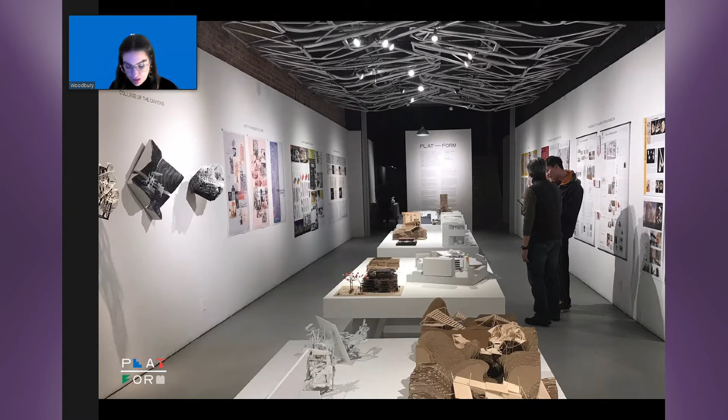Platform was founded 4 years ago by the Woodbury Chair of Architecture in Los Angeles, Heather Flood, and was created as a new and collaborative opportunity to recognize and celebrate incredible work happening throughout art, media, and design programs in our state's community colleges. What started as a symposium would eventually transition into an annual exhibit at WUHO, our Woodbury Gallery in Hollywood. This history makes clear that when you have the opportunity to see this collection of incredible work from disparate cauldrons of creative development, it deserves a platform for cross-pollination of ideas.

When looking at ways of hosting Platform this year, we considered creating a virtual gallery, but knew such a venue would be bereft of the thing that makes Platform so dynamic: the people. Beyond the celebration of the work, what we hope Platform does tonight, as it has done in the past, is create a space of interpersonal exchange.

Platform has taken many forms in the past, and tonight will be no exception. This year's installment comes in the form of a virtual Pecha Kucha night. If you are new to this format, the rules are simple: each presentation is exactly 6 minutes and 40 seconds, 20 slides, 20 seconds each, firing off like a creative machine gun. The slides move so rapidly and automatically, it's part of the fun and drama of challenging the presenter to do the same. Even this introduction is part of that format.

Tonight, we have 13 presentations from 11 community colleges spanning the geographic and disciplinary diversity of Southern California.

From the moment I started working with instructors and institutions— Erin, I'm getting a feedback loop. I don't know if anybody else is. No. I'm going to keep going because the time's going.

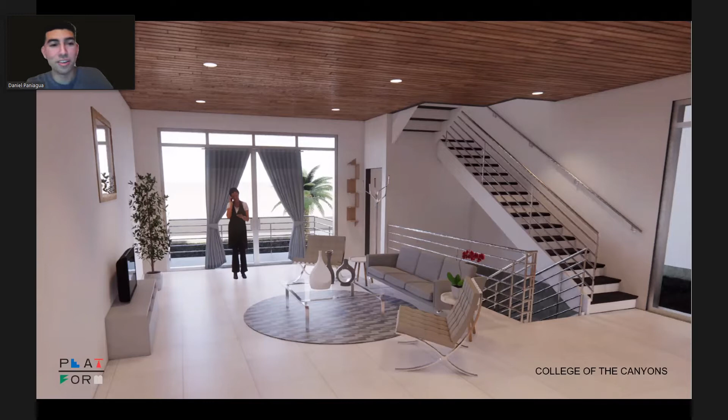Hello everyone, this is my interior rendering of the final project for our introductory course of BIM, specifically using Revit. So here I decided to add just enough components to give a potential client a good idea of what the space can look like if they were to occupy it. However, I also made sure that the image was not too overcrowded.

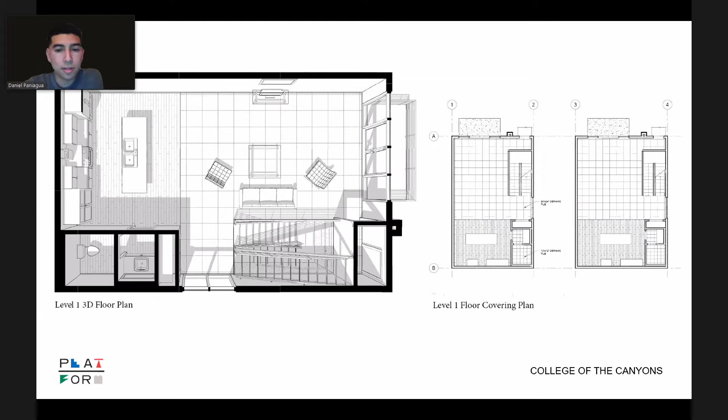I placed this image on the left to show how the use of cameras can really make certain views more interesting to look at, in this case resulting in a 3D floor plan. We also looked at different ways which we can display materials. On the right side, we use fill regions, while on the left, we played around with splitting faces and applying paint. Now we finish with an exterior rendering of the northern part of the building.

Hi, my name is Christian Filip. I'm an architecture major, and I'll be presenting the project I completed in the design studio class at College of the Canyons.

For my concept, I decided to lower the roof line closer to the height of the adjacent buildings in order to have my buildings fit in more harmoniously. I placed the entrance of the Warby Parker store at the east opening of the facade and kept the cafe seating right off the exit of the cafe.

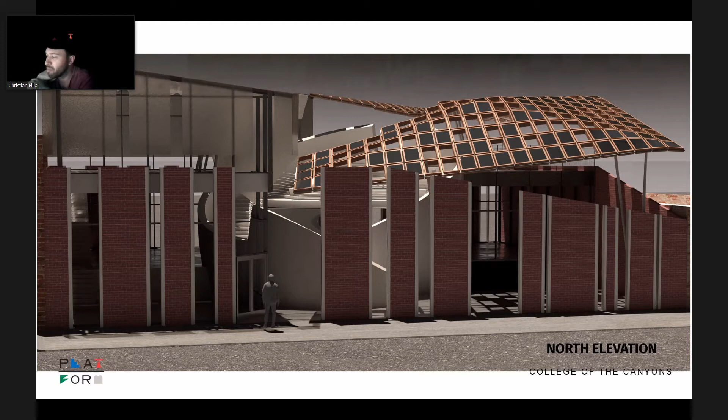For the facade, I wanted to use materials that blended in with the environment, but chose to break it up sporadically in order to allow light into the space beyond, as well as allow people to get a glimpse of the Spanish Stair. This was imperative since the steps were intended to be used as a public space by the community, and so I did not want them to appear hidden behind a solid wall.

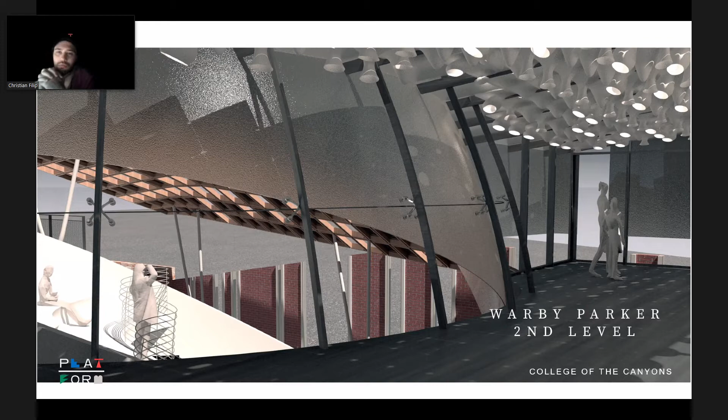This is another rendering from the Warby Parker store on the second level. Looking toward the Spanish Steps, you can see the polycarbonate second facade and also the ceiling installation to better show the lighting in the space.

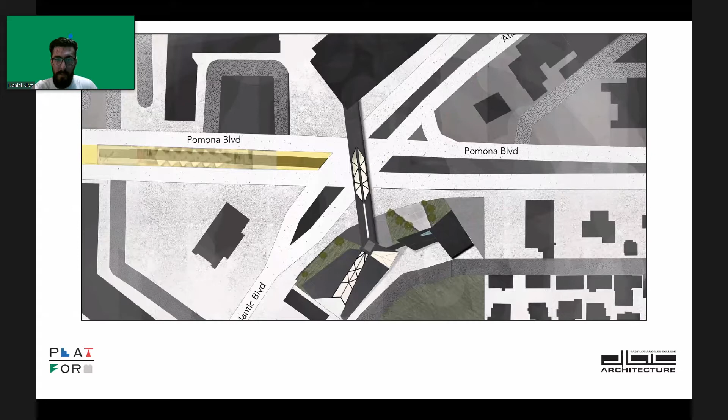This is a fabrication building, and this is where the students would study. The way I came up with that design was to take the vector lines from Atlantic Boulevard and Pomona Boulevard, then create another vector line from my site to the parking lot, bring the vectors onto my site, and then extend a bridge out to connect to the parking lot.

Next, I used existing tree grids that are on the site. I didn't really want to touch the trees that exist on the site because I saw them as a potential buffer space between the sidewalk and my design proposal. So I used the tree grids and combined them with the vector lines to try to form my program out of that.

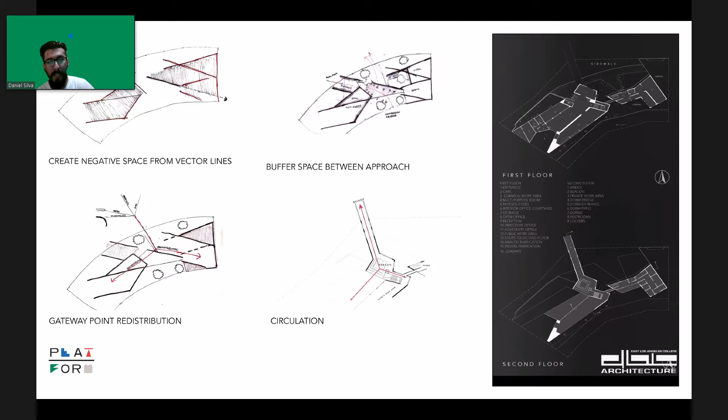Next, I use the vector lines, and where they intersect, I use them to create negative space to create my program. But then when I brought down my vectors onto the site, at the converging point for the gateway, I saw that as a potential way to lay out my beacon, which could be seen off the 60 freeway.

For my beacon, I went with a darker color because I wanted it to be able to be seen from the 60 freeway. But also at nighttime, I wanted it to be lit, so it's still a beacon at night.

Hello, everyone. My name is Stephen Curtis. Swavilion is a community center design project based in East Los Angeles.

The project design is inspired by the cultural artistic tribal masks of the three most populated ethnicities within the area, representing not only East LA, but its connection and integration to Montebello as well as Monterey Park communities.

The site is located along the border of Monterey Park and East LA. I wanted to capitalize on the foot traffic that came from the Metro Gold Line along the intersection of Atlantic and Pomona Boulevard. I also wanted my overall shape to serve as a 360 view to capture the surrounding mountain views within the area while fitting to the form of my site.

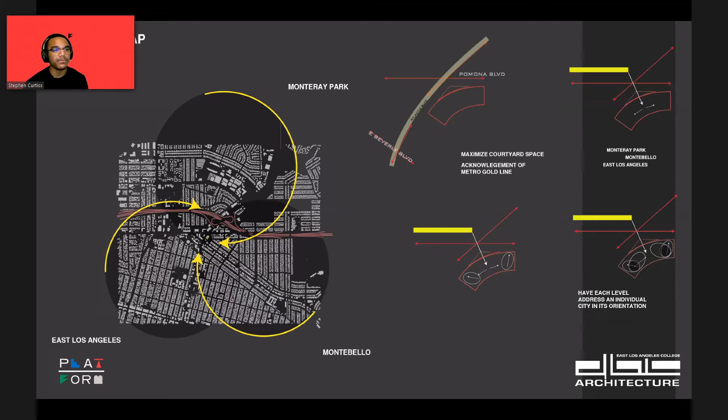After developing the traffic and public transportation, I began to break down the chosen tribal masks from Aztec and Asian cultures to determine elements such as the circulation, facade development, as well as overall spatial relationships.

The program is organized to express public outdoor program toward the lower levels and private toward the upper levels. For example, level 1 provides a grand entrance greeted with an open courtyard, cafe, and fabrication shops. Level 2 quiets down the program with classrooms, study rooms, and offices, while level 3 provides private dorms.

My exterior circulation mimics the contours and patterns of the Aztec and Asian tribal masks, whereas my interior circulation is formed and developed on the double spiral staircase.

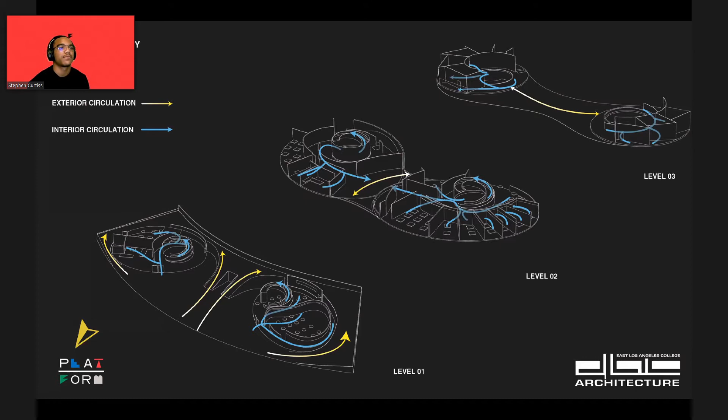On my northeast elevation, you can see how the second level extrudes. On the southeast elevation, you'll notice the separation of programs of the left and right wing, connected by the exterior wooden deck space provided at the second level exterior courtyard.

To better control the building's natural light intake, I positioned the obsidian facade to wrap around the structure, sitting along a 180-degree panel to not only absorb, but position natural light within the interior space when necessary.

I wanted to use materials relating to the culture's tribal histories. I used travertine, a relatively bright stone, for the outer shell of the design. I used fritted glazing for the unique apertures that wrapped around the structure, and obsidian for the facade panels and foliage along the courtyard space on the ground level.

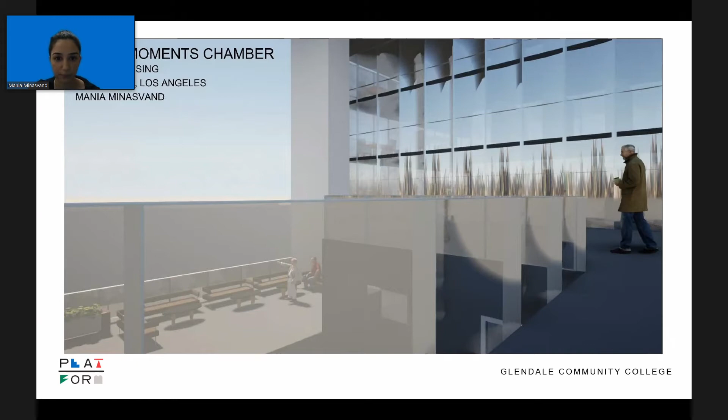The site is located in downtown Los Angeles at the intersection of West Pico Boulevard and Hope Street. The Dignity Health California Hospital is located at the southeast corner, less than half a city block away from the project location.

The project site is located in the middle of Los Angeles' evolving skyline, from low-rise building to high-rise building. So the rising height of the building represents the milestone of time.

The word Janus in my project title, Janus Moments Chamber, is taken from Roman mythology. Janus is an ancient Roman god who is the god of beginnings and ends, with two faces, one facing the past and the other facing the future.

To the northeast of the site, we can see Los Angeles' downtown skyline, which represents the future. To the southwest, we can see low-rise buildings that represent the past. So the rising height of the building represents the milestone of time and the present.

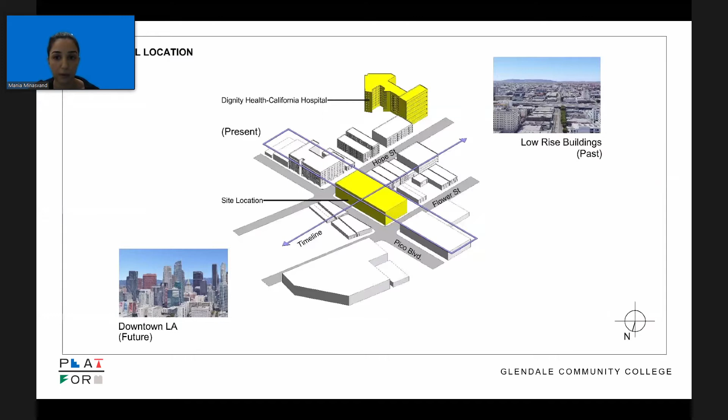This image is the parti diagram of the chambers. The living units form a solid block, voiding a hole in the center to define the space of the time machines, which are the theater and the library. The yellow part on the right image is where the theater and library are located.

The moments are an accumulation of the present time of seniors occupying the living units. The living units and corridors are facing each other, so residents have to interact with people before they enter the unit. This encourages social interactions.

The chamber consists of a theater and a library. The library is to unveil and recreate memories, to preserve and store the past. These chambers are a metaphor of a time machine for people to commemorate those moments. The library is the contents of life, because each chapter of the page is each chapter of life.

It is a place to access the wealth of history and information, to preserve the past, connecting people to unforgotten knowledge, but also encourage social interaction. The theater is a place to retrospect and unveil historical memories, a reflection of society, both present and past.

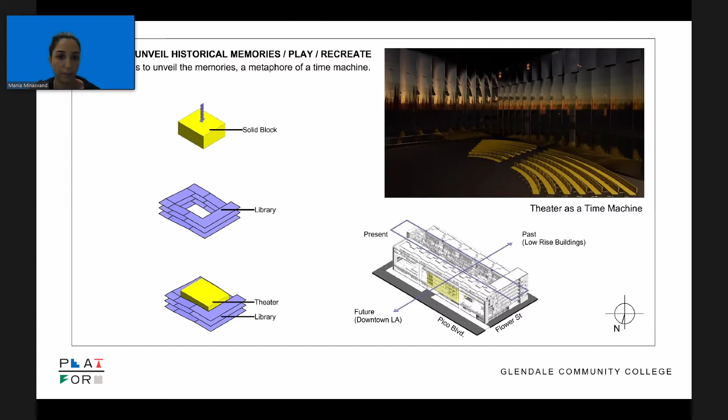As you can see on the diagram, the theater is a solid block placed in the center of ramps and floors, which is the library. The main circulation ramps, as you can see in the center, are forming the void shape of the theater, and it is forming the solid shape of the library. There are emergency exit staircases, main stairs, elevators, and ramps on each floor.

What do elderly people really want? An emotional scene performed by actor Rutger Hauer in Blade Runner carries out his famous quote, 'All those moments will be lost in time, like tears in rain.' This inspired me. The idea is not to cheat death, but rather to preserve, unveil, and commemorate all those moments, so these moments will not be forgotten.

The curved glass facade of the library and the theater are to create and reproduce the moments and images of a person walking by, to exhibit the function of life.

The building has 2 underground parking levels, a total of 200 parking spaces, including accessible spaces. The ground floor contains drop-off areas, an entry lobby with elevators, and storefront retails.

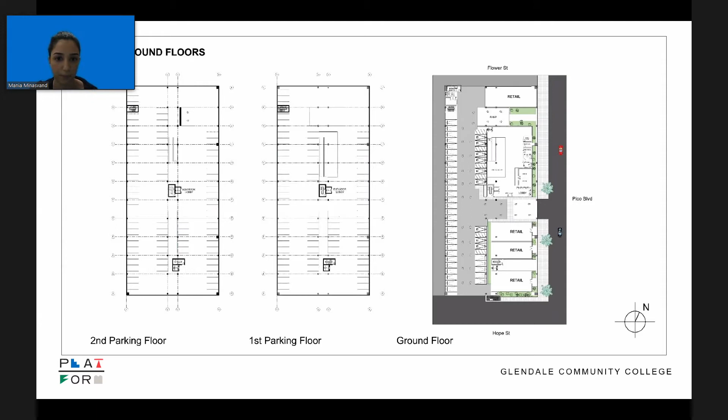The next level is the common area floor, which contains the care center, fitness room, outdoor exercise area, event and game room, and outdoor sitting area. Also, the main entrance of the theater and the library is on this floor.

There are a total of 53 living units. Each unit has its private balcony. 36 one-bedroom units are on the first, second, and third floors. Each floor has an entrance to the library.

16 two-bedroom units and 1 three-bedroom unit are on the 4th and 5th floors. There are also an elevator and ramps for each floor for them to reach different levels. Here are the 1-bedroom and 2-bedroom unit floor plans as well.

Here is the longitudinal section cutting through the 4th and 5th floor living units, also the library and the theater. As you can see in the image, there are also ramps from the underground parking floors up to the ground floor.

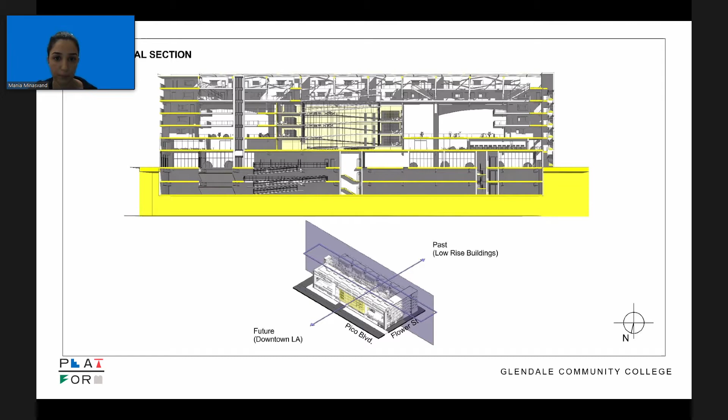The cross section also shows the living units, library, and theater. The living units on each floor are on one side, so seniors can have the maximum view from both directions, north and south. The corridors are in the center between living units, so they can have social interaction.

The answer to the question, what do elderly people really want, is: since they cannot cheat death and they cannot have more time, they want to leave a trace of their existence. Thank you, everyone.

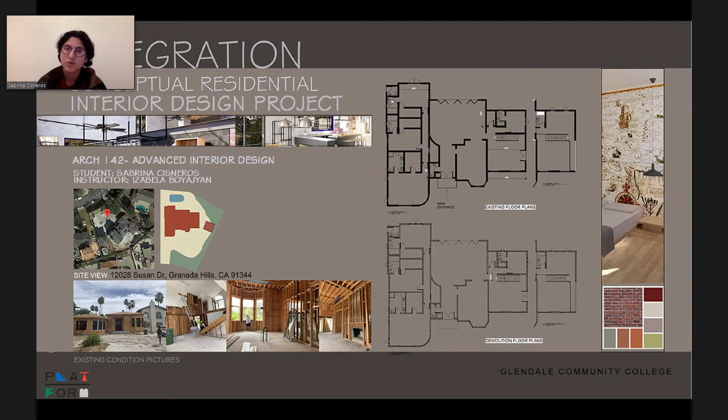The interior design integrates industrial and farmhouse design styles. My client's requirement was to create comfortable spaces within his home office, adding 3 bedrooms, each with their own bathrooms, and a relaxing room. The first level floor plan is located on the right of your screen, and the second level on the left.

The moment you enter the house, we appear in the interior garden, which leads to the public spaces to the right and the private spaces to the left. On the right-hand side, we have the kitchen and dining room.

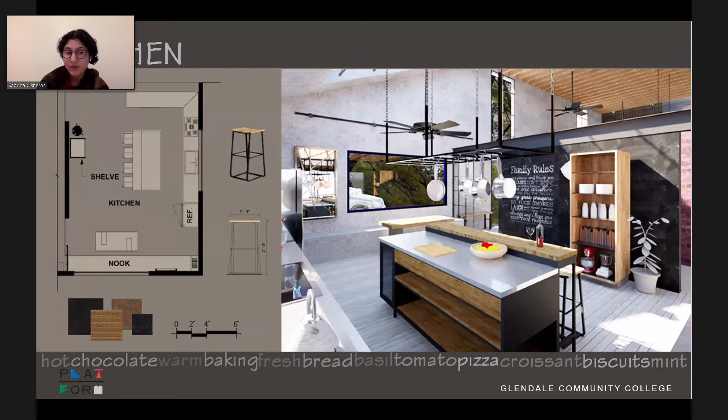Materials used are wicker wood and stainless steel on countertops, which makes the furniture durable and easy to use.

As you see from the floor plan, the bedroom has its own bathroom. The open concept makes the space practical to grab clothes. Since my client likes to travel, we decided to incorporate a big accent wall by using customized print wallpaper on the back as the major focus point of the bedroom to enhance the space.

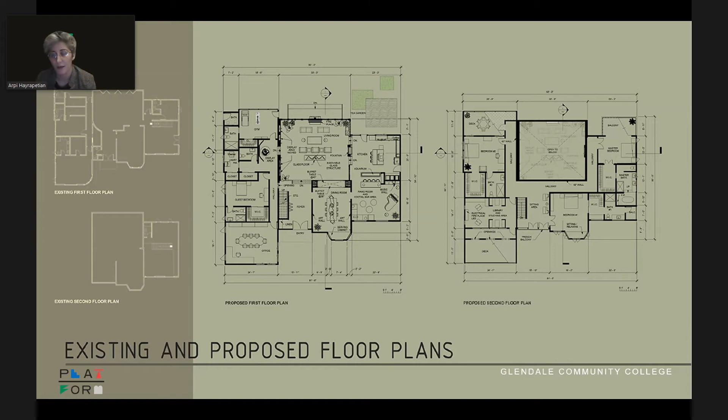I put every public area on the first floor, like the library or the kitchen, but the bedroom is on the other floor, the second floor. The great room, which is the main emphasized part, I put two stairs lower than the rest. And this is the great room.

It's not only for gatherings, but also to display honors, art pieces, and art collections as you wish. Inspired by Persian style, I designed art niches and used colored windows to make the entire west wall a unique display area.

Another thing that inspired me is the reflection of Persian stained glass. So I designed a movable structure here, and it has two functions: visual separation and a transitional element that creates comfort and coziness in the house.

For the kitchen, I started designing with traditional elements such as moldings and mullions, which remind me of old Parisian doors. It's also connected to the living room with the waterfall, and to the piano room with the aquarium.

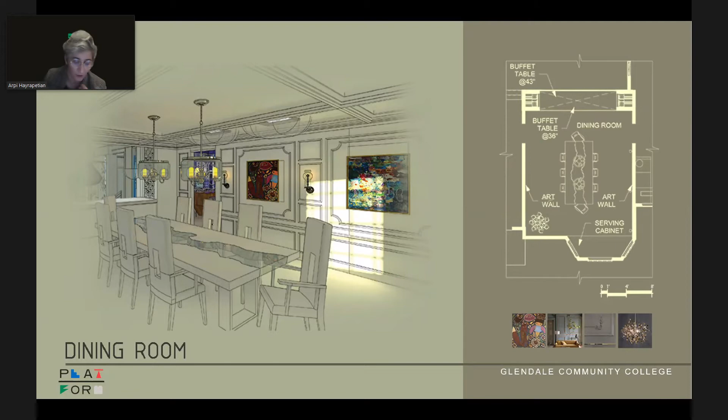This is my dining room, separated with a buffet table which has an under-counter wine cellar, and it displays on the whole wall the art of the French, the contemporary arts.

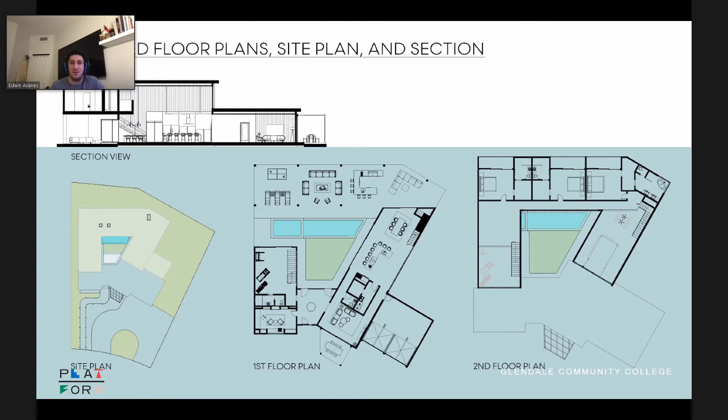Now in this room, although it seems like a small space, the usage of soft colors and natural materials brings a calm atmosphere that allows someone to get away so they may work, study, and relax. These are just some of the highlights of my project. However, this room is a focal point of what was being achieved for my design. Thank you very much.

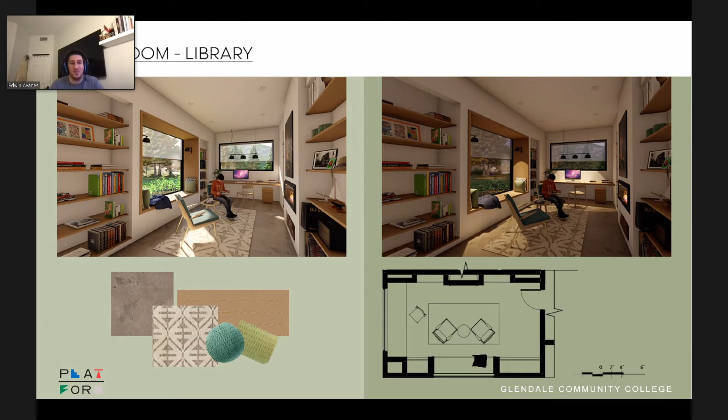Aaron, you're on mute.

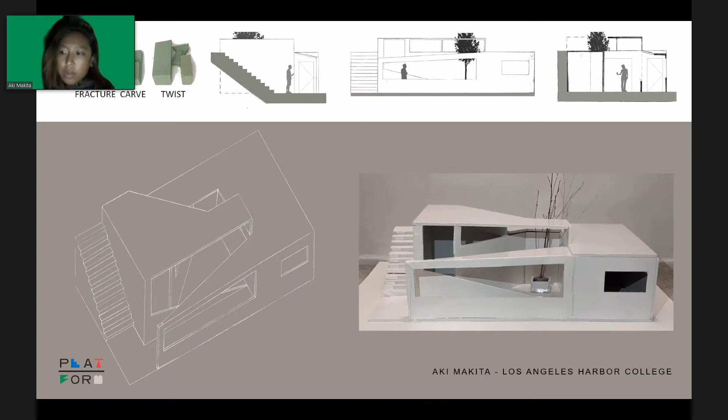Hi, my name is Aki. This project is a weekend retreat on a hillside. The forms are based on subtractive operations of carve, fracture, and twist, resulting in an internal courtyard. The design features subtle height differences that vary visitors' perceptions of horizontal and vertical space.

Hi, my name is Lucy Taylor. This was a study of subtractive forms in architecture. Using operative design strategies, we were to subtract and displace the volume of a solid box into a small three-zone building that takes view, sun, and topography into account.

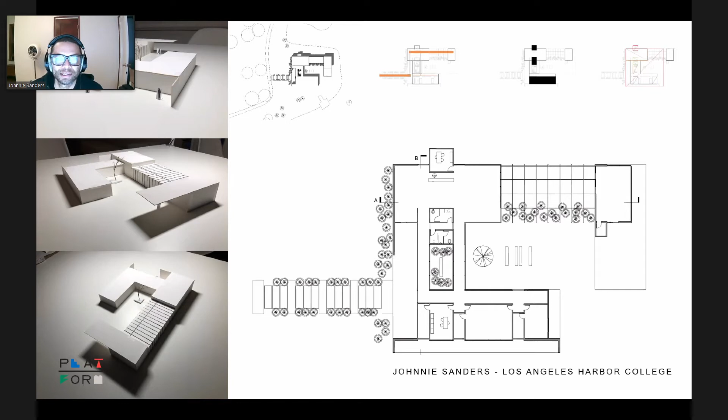In this case study of Craig Ellwood's House Number 16, we examined structure, circulation, open and closed spaces. We can see his use of long, thick linear structural walls in combination with large glass panels to define structural elements. The circulation from one part of the building to the next is defined by long passageways connecting the rooms or open and closed spaces. Ellwood also uses repeating structural elements, which I incorporated.

This project is called Big Brother, Little Brother. It is a series of spatial constructs based on the ideas of Plummer and Swisher that explore the relationship between grids, modernism, and digital life. The strategy of analogous design was applied to create U-lines, figures, and fields in relation to grids, proportions, and intersections.

The Glassman Residence, my case study research assignment, was built by architect Richard E. Quinn in 1966. The home showcases its cross-shaped floor plan below. This diagram best describes the organization of its form through its structure, parti, and geometric elements.

Well, this is mine. In this case study, the architect Julian Neski mainly focused on voids and keeping a simple circulation throughout his building while trying to capture the view of the amazing ocean. So I tried to incorporate those ideas in my project as well, trying to keep the similar structure and massing.

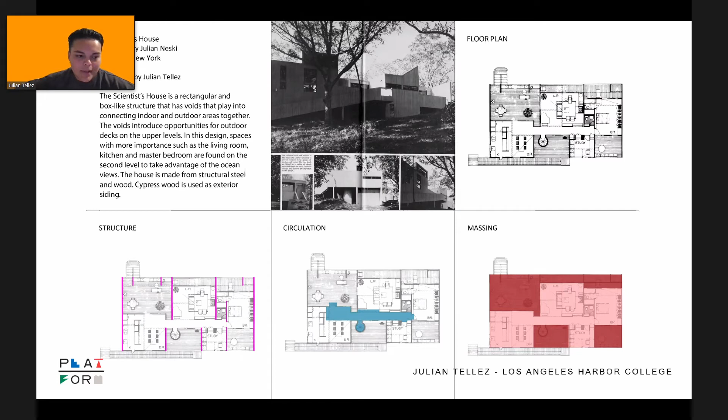So the site's best view faces east towards an open body of water, so I wanted the first floor to have a lot of open space to best bring in light. Once I knew where I wanted each room, all I needed to do was punch holes in the appropriate places that best relate to the case study. I'm just glad I chose this case study because I think it fits well with this project.

For my design, I decided to focus on semiotics, which identifies an object with a signifier, its physical existence, and its signified, its mental concept. Therefore, I decided this squiggle shape to represent rooms so I could have shifting floors, roof axis, and building gradients.

This is the result of the museum. It is designed with 3 floors, 2 above ground, and 1 subterranean gallery, as well as a subterranean parking lot. The subterranean gallery and parking lot are to the left, and the 2 other floors to your right.

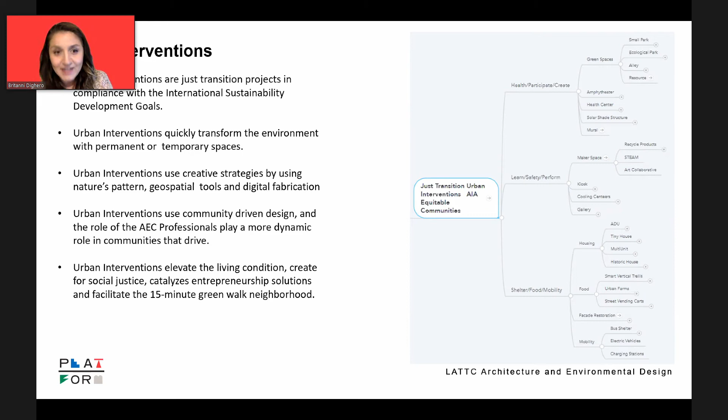Our focus at LATTC is urban interventions. On the right, you can see the taxonomy of our efforts as we study and practice this phenomenon, never starting from scratch and always building upon information, resources, and efforts gathered in previous semesters. As the program grows, so does our knowledge base, and in turn, our creative solutions and strategies.

Our residential urban intervention focuses are tiny houses, accessory dwelling units, and multifamily residences. These modular templates make the inner workings of architecture approachable and accessible by making it easy to customize and build upon, while keeping the projects within building codes and regulations.

Our urban intervention designs focus on sustainable solutions, considering water, energy, wind, and recycling. Here we see various ADU designs with customizable modular orientations, solar path, wind path, and water recycling considerations.

Here we see how our tiny house templates can be easily customized, further promoting the tiny house ideology of environmentally conscious, self-sustainable, holistic, and simple living.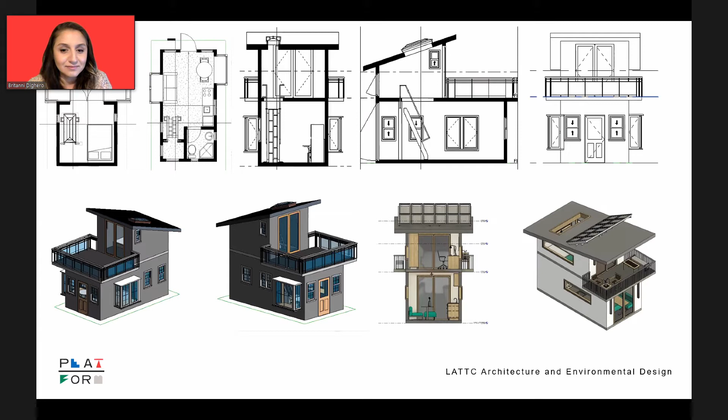Other urban intervention projects include conceptual designs for large open-air community spaces inspired by the Spin Campus plan, which uses digital manufacturing, cargo containers, and pre-manufactured materials. Professor Oliva believes green builders and developers should consider creating a center or network to develop and nurture green spaces as a strategy for sector success.

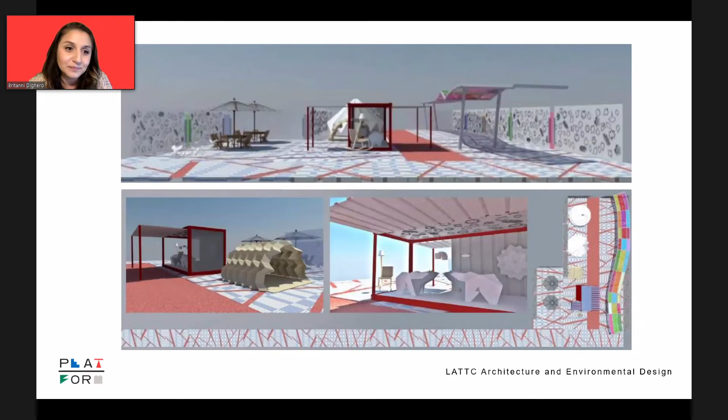This innovative alley renovation proposal makes the most of the space available by transforming it into an archery range and field, promoting community engagement and outdoor activity. The vibrant and eye-catching design and murals add to the excitement of the activity and the transformation of the space. The obstacles allow archers to take cover and strategize while they play.

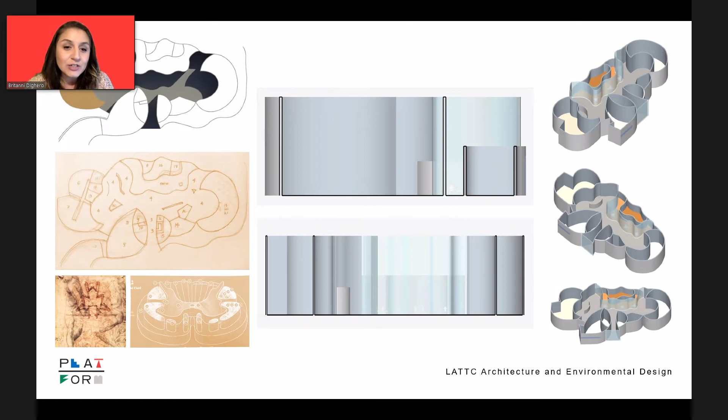This proposal for an outdoor interactive museum and gallery space was inspired by Michelangelo's fortification of the city of Florence and curves and geometries found in the human body. This unique idea explores the boundaries for how humans interact with art and exhibitions by bringing them out to the people. These images illustrate just how unique and immersive this design really is.

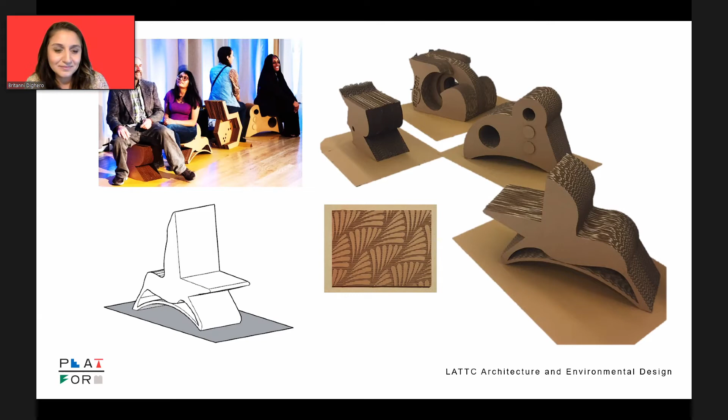Our urban interventions have even reached civil heights, including a proposal for a nature bridge that connects outdoor spaces in a beautiful, elegant, and creative way, reinventing what pedestrians have access to and how they have access to it. This design promotes mobility in green spaces in communities that may have not previously had access to one another or green spaces.

LATTC, along with the Pico Union Housing Corporation and the Puede Center, have worked together to create proposals for the community to transform alleys using green alley renovation strategies, such as vertical trellises, facilitating quick, efficient, and vibrant changes to the most neglected areas of our neighborhoods. We hope you've enjoyed the efforts LATTC is making to build a better world.

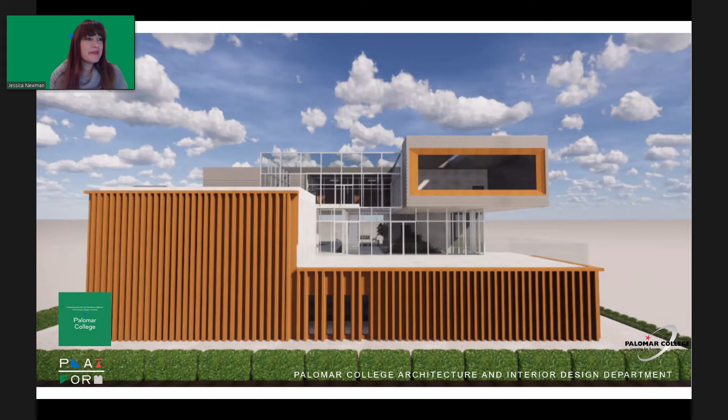Hi there. In the spirit of collaboration, we brought together an architecture class and an interior design class to work together on a team project. This project was a new building on Palomar's campus to house the architecture and interior design departments. Today, we're showing a project solution from one team, Natalia Olivera from the architecture department and Michelle Yip from the ID department. Each semester we try to come up with an exciting and dynamic project for our students to dive into. In Studio 217, we study site connectivity, code, and in this case, the collaborative nature of our industries.

We were fortunate that Palomar had a vacant lot that the students could study and create their own learning environment. Here you can see the student went out and photographed the materials on campus and selected a few that she wanted to explore: bamboo siding, polished concrete, and aluminum cladding. The contrast between these materials created a dynamic elevation, one that blends into the campus seamlessly.

This bold selection of aluminum panels coupled with horizontal banding helps accentuate the cantilever. Here we can see the material is solidly present on the ground plane. This helped to express the building's mass. She created voids that would help define the entry and assist with wayfinding.

Here, the student explores bamboo siding with a vertical application. Once again, it can be found on campus, and this exploration is unique and dynamic. Stairs become a key feature leading pedestrians to the upper floors. Here we can see the cantilever floating above a terrace, inviting students upwards and into the building.

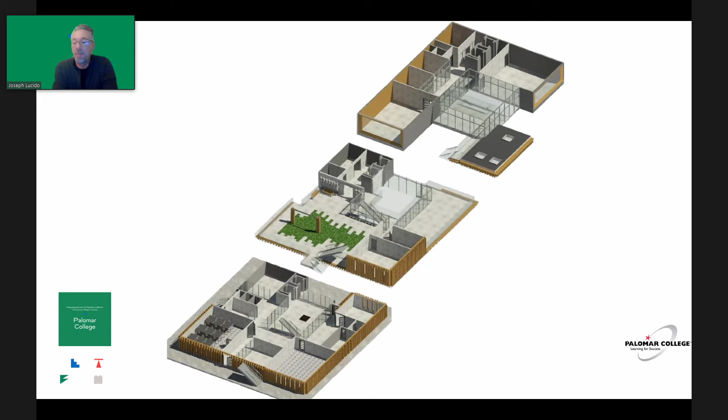Three-dimensional modeling allowed the students to study the vertical circulation and the interior design department's programmatic requirements. This proved to be a key element to allow both students to communicate their design intent. The building you saw may have been developed by an architectural student, but it was certainly informed by her interior design colleague.

On the first floor, we have 2 large classrooms, 3 faculty offices, restrooms with showers, student lockers, print services, a makerspace, and a large atrium. The atrium acts as an entry lobby, a lounge space for students, and an interior landmark for wayfinding. The makerspace, print services, and elevators are located far from the classrooms due to noise.

Here we see an interior view of the atrium. There are digital displays to post information about the programs, such as class schedules, announcements, and guest speakers, as well as showcase exceptional student work. The designers also envisioned that students would design and hang a badge on the tree as an interactive and constantly changing piece of artwork.

In order to justify this 3-story structure, the students envisioned the second floor as a student services space. This floor takes advantage of the beautiful weather here in San Diego, with an outdoor classroom and an open multi-purpose space that can be used for larger groups like guest speakers. There's also a library, study rooms, and a kitchenette.

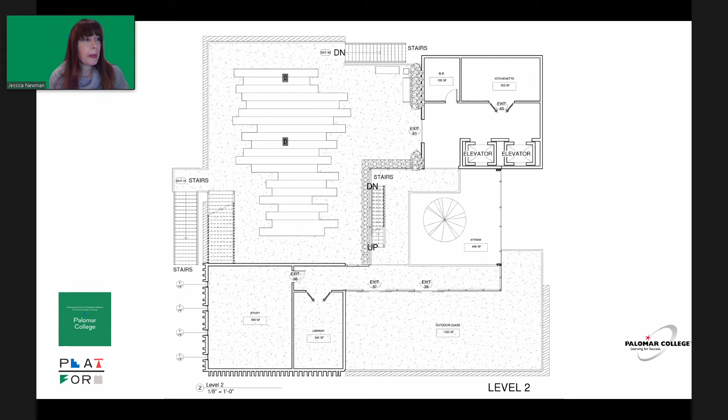Palomar campus is accredited as a level 2 arboretum. It is the only community college in California with that distinction. Throughout the campus, we have ADA compliant nature trails, outdoor sculptures, and primitive plant collections.

The students continued this focus on foliage by incorporating greenery, a connection to nature, and views of the landscaping throughout the interior of the building. This outdoor classroom helps to reduce student sickness caused by indoor air circulation. The framed greens offer shade and help to screen ultraviolet light. Additionally, the green trellis design helps block visual distractions while still allowing students to enjoy the fresh air.

This is a building that prioritizes the safety of its occupants. There are 4 exits, including an extra emergency stair from the second floor to the ground. All of the corridors are 7 to 11 feet wide, allowing for plenty of air circulation. These wide corridors also allow for spontaneous interactions between students. You can stop someone and have a conversation without blocking the flow of traffic.

Enhancing a sense of community is a theme of this building. The designers feel that the form of the building looks like 2 people hugging each other, which is symbolic of the joint effort of architects and interior designers working together.

This project was actually not a smooth journey from start to finish. These 2 talented designers had different aesthetic sensibilities, and they redesigned over and over until they came to this solution.

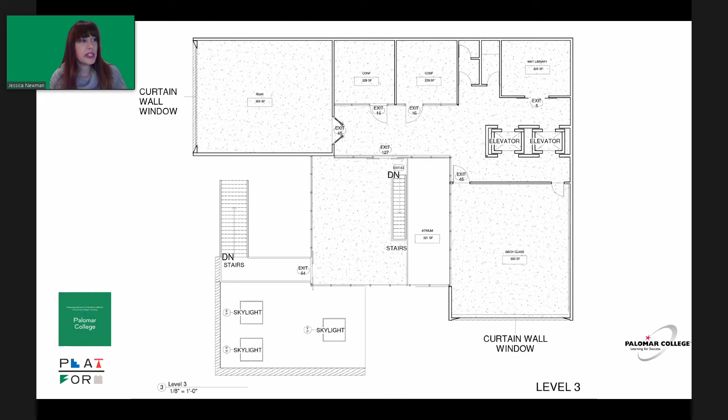We asked students to reflect on their own experiences in the classroom and how they could be improved through design. The students responded with a more flexible arrangement: yin-yang tables that are reconfigurable to fit different class needs and that fit into each other like the 2 exterior building masses.

Next, we can see one of the main compromises reached by the designers. The architect wanted a brutalist structure of solid concrete blocks, while the interior designer wanted large windows for the enjoyment of the people inside. They compromised on narrow rectilinear openings behind the wood cladding, which allow light to come in without breaking the solidity of the building concept.

The project's concept was to build connections between students in both departments. As I always tell my students, your classmates today are your colleagues tomorrow. College is not the end of your educational journey, but rather the beginning of your career. I truly believe students gain just as much knowledge and value from each other as they do from us, and this project perfectly encapsulates those ideas.

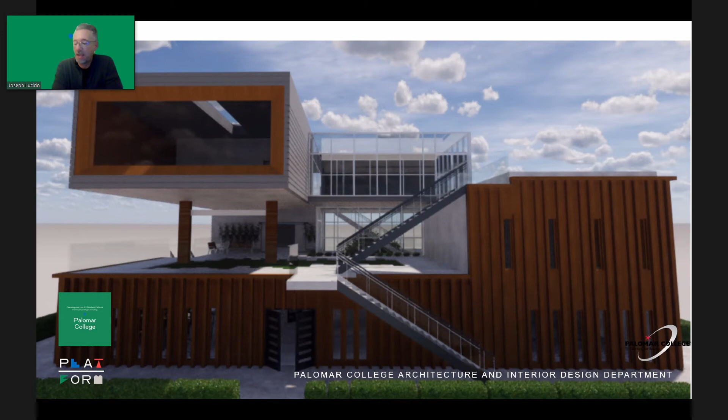The Career and Technical Education program at Palomar College strives to create a learning environment that replicates the real world, preparing the students for both the educational component as well as the soft skills needed to succeed. Projects like these allow the students to experience the demands and the rigors of industry.

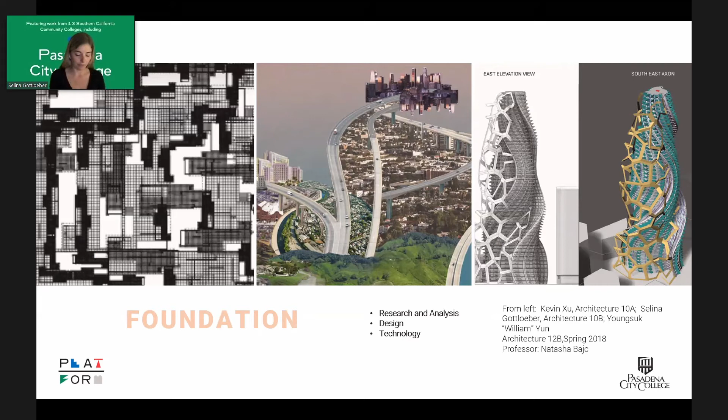During the first semester, students are introduced to a full scope of architectural design projects. The projects move from very simple at the beginning to more complex later on. Students work with precedents, scale, and transformation, and their work involves drawings, model making, digital modeling, and rendering.

During the second semester of the first year, they work on projects which deal with urban context, the housing crisis, and historical narratives. The projects address multiple scales and introduce students to an architect's responsibility, as well as the importance of demographics, gentrification, and context to the project.

It further addresses challenges of the housing environment, negotiating shared spaces and private spaces. The task was to create co-living in times of a pandemic.

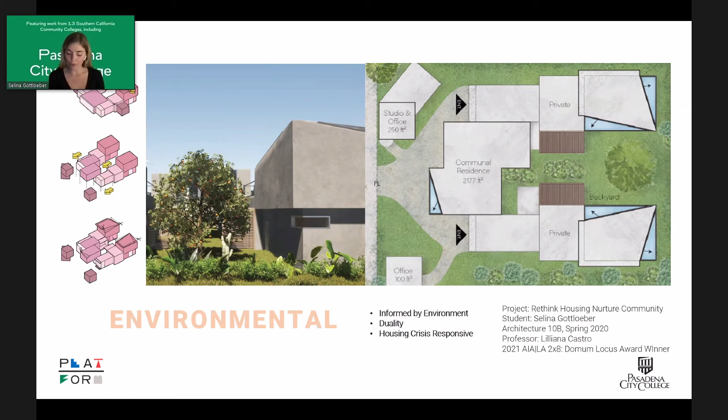Determining shared living in exterior and interior spaces, the project had to solve environmental conditions like light and their effect on the interior. With a focus on the user experience, we created quality spaces responding to environmental factors. We respected the privacy of the tenants and took into account new COVID-19 guidelines, while keeping in mind the interdependence of the spaces.

Our second big area of education is technology. Our approach here is using analog and digital at the same time. We teach a wide range of skills, including model making, with an emphasis on materiality, its properties, handling, and scales.

We use digital technology and development for software, workflow, and document production, while also laying a strong foundation in digital design and visual communication. We introduce students to programs like AutoCAD, Rhino, and Lumion.

We are actively engaging in emerging technologies as well. While teaching Rhino during the second semester, students get introduced to Grasshopper and first coding techniques to start their digital fabrications. They also get first insights into the world of parametric design.

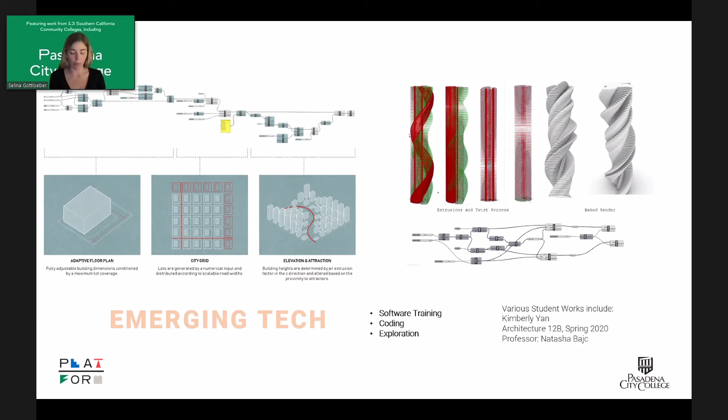After talking about abstract and new technologies, I want to circle back now to something more traditional. One specific course explores materials and methods, especially the relationships between materials and methods of construction, together with the understanding of spaces and human experience.

The project involves team research, design, and fabrication. From the very early exploration of small-scale models to the production of life-size prototypes, the project includes a full scope of work for the students, from designing all the way to building it, especially emphasizing teamwork.

The last aspect of the technology education at PCC is a class that develops professional skills by producing a full drawing set in Revit. This serves as preparation for the office environment where graduates will have to manage workflow. We are further developing this part of the program to support students who want to head straight into the industry.

During the second year of education, students strengthen their conceptual design skills. The projects take on more complex challenges, such as site and program constraints. They are process-driven by research and analysis, include a response to community, and address comprehensive building systems.

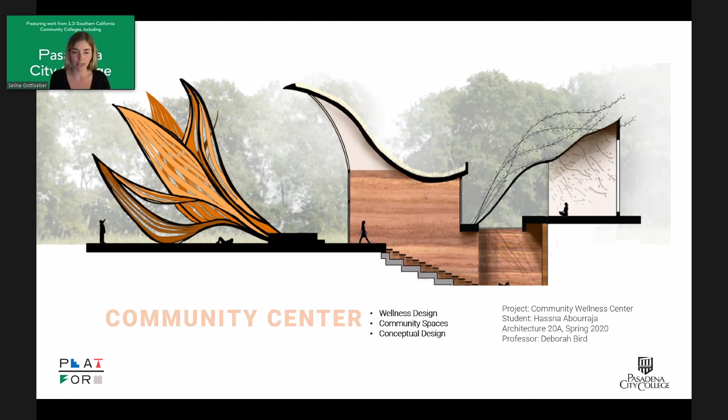Another important aspect of the projects is integration: integrating environment, context, and program into the design process, but also within the design development, focusing on integrating interior and exterior public space, integrating building into the landscape, and integrating individual needs and community in the times of COVID.

During the last semester of the studio, the projects combine everything we have learned so far. Students develop individual attitudes and responses to design challenges, bringing together research, analysis, environment, conceptual, and schematic design. The class further teaches us responsibilities as architects and sensibility to our context.

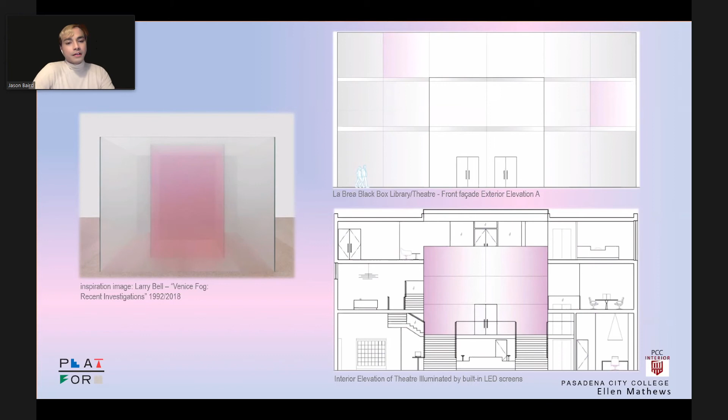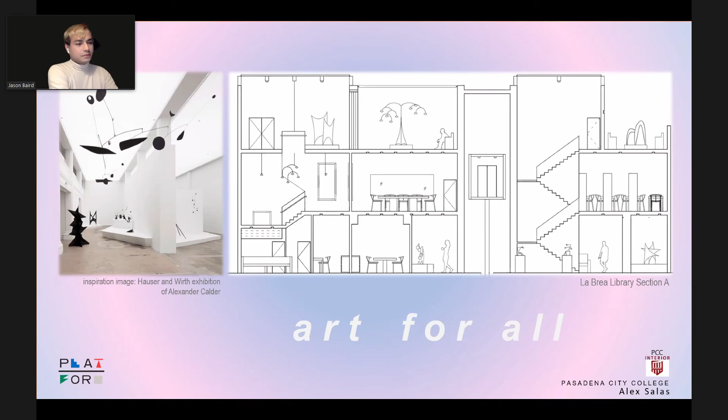And lastly, my design, interior design student Jason Baird focuses on healthcare rights, designing for future pandemics, green space rights, and design for all for the future library project called the Neue Modern Library.

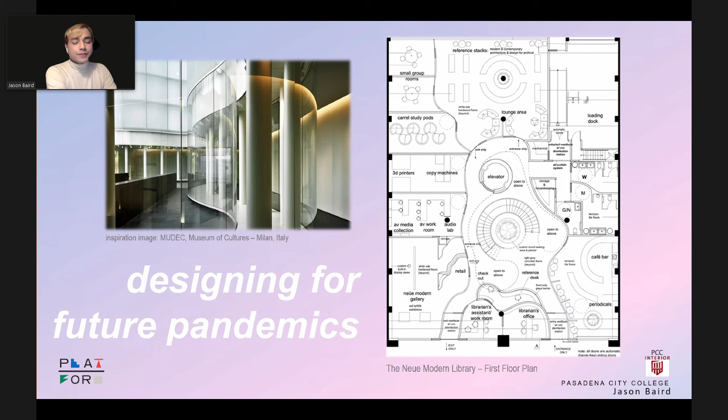Through waves of light and shadow, sun and clouds, the areas move through the filtered light. Darkness falls with Aurora Borealis' lights. The Neue Modern Library longitudinal section.

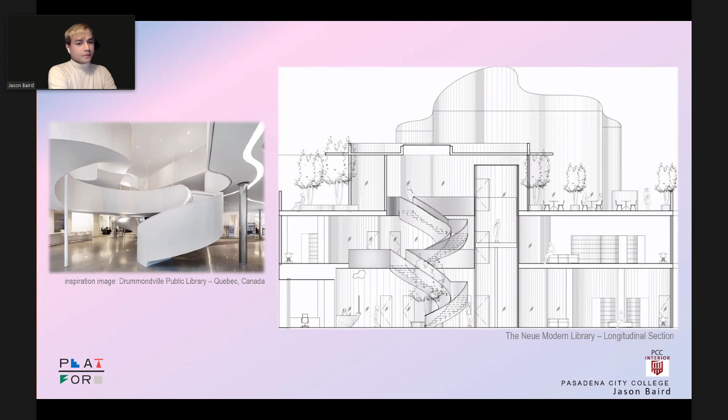An excerpt from The Hill We Climb by Amanda Gorman: Let the globe, if nothing else, say this is true, that even as we grieved, we grew, that even as we hurt, we hoped, that even as we tired, we tried, but we'll forever be tied together, victorious, not because we will never again know defeat, but because we will never again sow division.

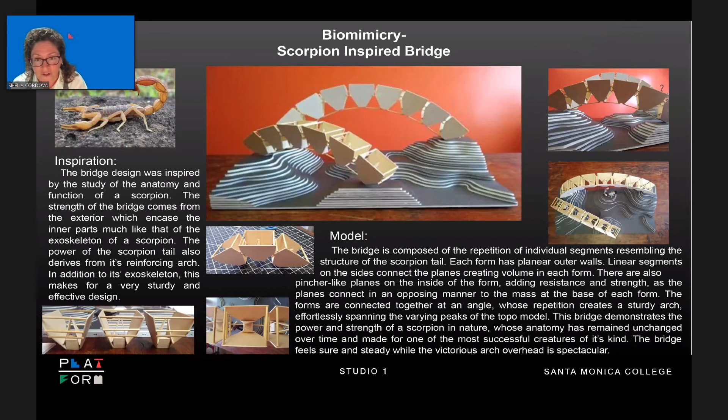The students really enjoyed all the play that they did at home. Sustainability is integrated throughout the program. In this project, you see design through biomimicry. Students are currently working on adaptations for spaces in the post-COVID world right now. We're all wondering how design is going to be affected by the pandemic. We just started architecture, so the next studio work is from our talented interior architectural design students.

Hi, I'm Tina Reitz. I'm a first-year student at Santa Monica College. This project is based on an ADU need by a family named the Noblus.

They travel quite often and only find themselves in Malibu about half the year, so they decided they wanted to put an ADU on their Malibu property. One of the keys was that we were working with only 1,200 square feet.

The solutions we needed to find were how to bring natural light into the space, how to make sure every space in the ADU has a view of the ocean, and one of the key features was the idea of enlarging the living space itself.

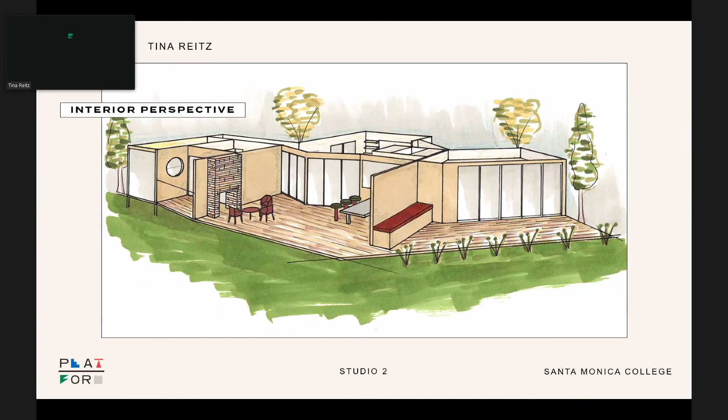Seen here is the outdoor patio. The walls actually extend past the ADU, so this is not technically permitted space. There's an outdoor dining space, an outdoor living room with a double-sided fireplace, a private patio for the left wing, which is the private bedroom quarters. The right wing is the office space, since they'll be working from home during COVID.

This is a glimpse into the bathroom in the private space with an upright bathtub with a full glass window that cantilevers over the cliffs, so they feel like they're submerged in the landscape and can see the ocean. This is a view of their bedroom with its private patio and fireplace.

Yeah, that went very fast.

Hi guys, my name is Aron Anderoe, and this project I'm presenting is a group project I made with my classmate Angela Martel. We were given the assignment by our professor to draw and design a new building for the organization called Home, a community center in Los Angeles that creates a safe space for young people in the community.

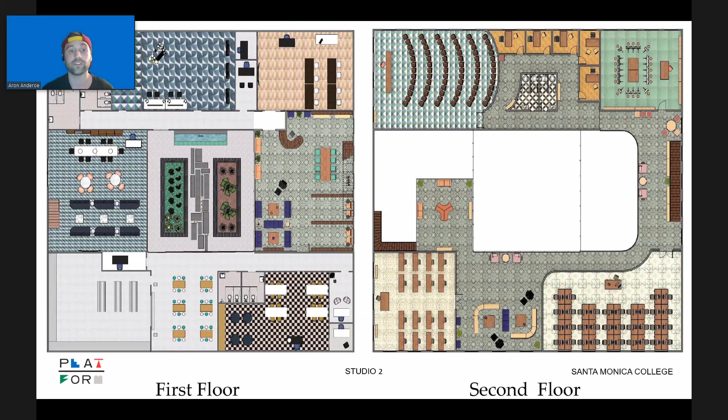We designed this 12,000 square foot building like a square with a central garden in the middle, where members can learn everything about the importance of farm to table cooking. We wanted our design to be smart and playful with a good floor plan and a building that is easy to navigate, with classrooms, an art studio, a computer lab, a kitchen, a cafeteria, a library, as well as a space for film and music recording.

All of this, but also creating spaces for the kids to just hang out and have a good time with their friends.

So basically I did the second floor, and Angela did the first floor. This is the student lounge you can see there, and there is the library. That's it.

Hey everyone, my name is Matt. I designed the LGBTQ Cultural Center in Los Angeles, which represents my vision of a space that celebrates the advancement of a community long repressed. The goal is to encourage positivity with forward-looking surroundings.

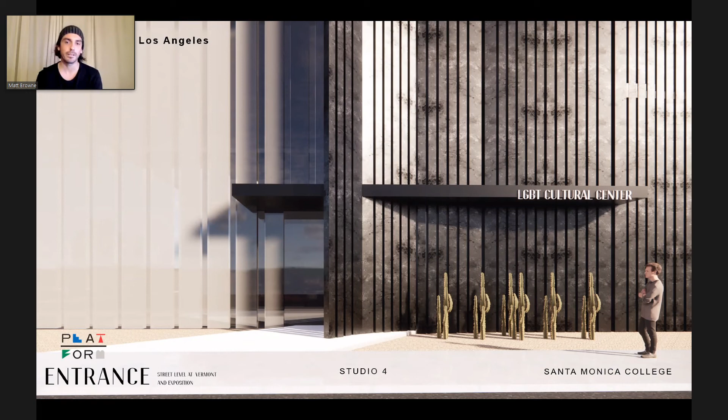Here at the main entrance, the glass beams of the facade seem to peel away, leading you into the lobby below ground. While appearing modern, the hidden door gives the visitor a taste of the past, when having to enter spaces secretly was pretty common.

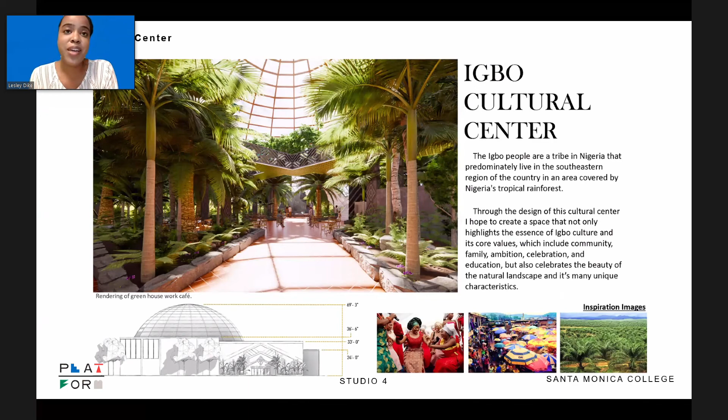Hello, my name is Lesley Dike, and for my project, I designed the Igbo Cultural Center. I chose this culture because my dad is from Nigeria, and I wanted to show more about Nigeria and learn more about the culture. So that's what I did for this project.

With the design, I wanted to highlight the natural landscape, since Igbo land, which is what it's often referred to, is located in Nigeria's tropical rainforest. I also wanted to use the Uli art style, which is a mix of various symbols that have different meanings.

And so I incorporated mostly the kola nut symbol, which means welcome, which is that diamond shape. Throughout the design, I wanted to use a lot of textures and patterns, not just to represent the Uli symbols, but also the fabric they used to make their traditional clothes incorporates a lot of patterns, textures, and mix of materials. So that's what I did, mostly in that cooking demonstration area.

And for the greenhouse, I wanted to highlight the different aspects of the natural environment, the built environment, and art. So for the floor, I used red polished terracotta tile to represent the red soil that's seen out there, and the bronze is mostly used for metal artwork.

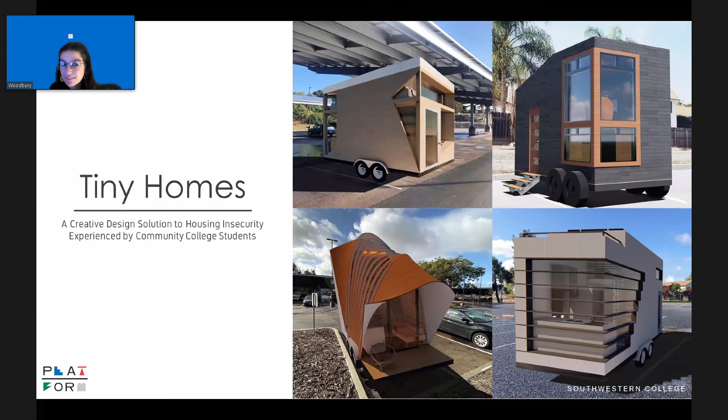Hello everyone, my name is Adriana Lucero and I'm a student of the architecture program at Southwestern College. This project was designed to allow architecture students to design solutions to student housing insecurity on our campus, allowing us to see the different improvements tiny homes can make in our daily lives.

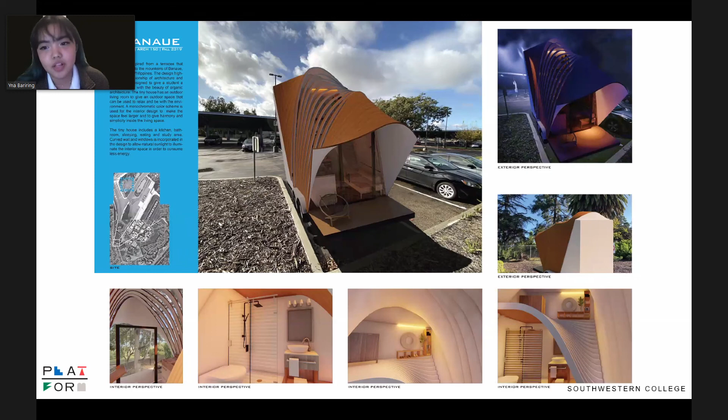The client is a homeless student. We spend 87% of our lives inside houses and buildings, and I want to make that student feel inspired every day. Design is a tool to enhance our humanity. That is why I specifically chose these terraces, because it is a symbol of survival and identity to the people in the Philippines, which reflects that the tiny house will symbolize resiliency.

Hello everyone, my name is Justin Boro, and the name of my tiny home is Tiny Module A, which was designed to reflect the refined, minimalistic, and open style of architecture that is appearing to manifest itself more and more in the design world we live in today.

This tiny home was designed to fit everything that is needed, no matter the situation, for any student that unfortunately may be struggling with housing insecurities. Inspired by the Casita tiny home and the facade of multiple Apple stores, Tiny Module A represents the strength and beauty of simplicity with its essence.

Hi, I'm Angelica with the Hive 20 tiny house I designed. This tiny house was designed to be an energy-efficient home for 2 students at Southwestern College. It consists of all the comforts of a regular home, such as a living room, a kitchen, and a full bathroom. There are also 2 bedrooms on opposite sides of the home for each student.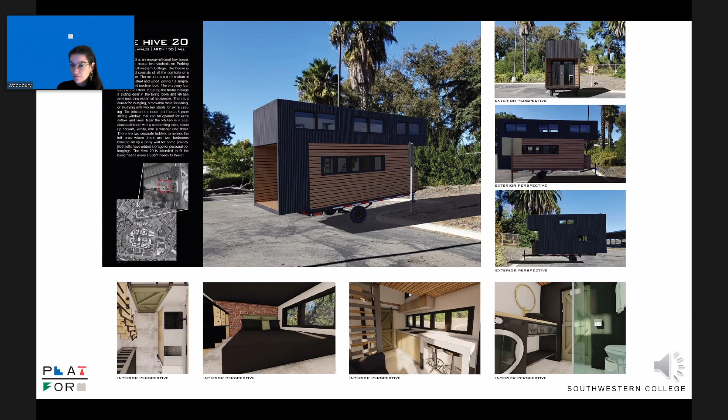The exterior of the home is a combination of corrugated steel and wood, giving this home a simple and modern look. On this board, I'm able to illustrate a few different components used to develop my design. I share a bubble diagram, a program matrix, floor plans, elevations, and some of the energy efficient components, as well as some of the furnishings I used for functionality and comfort. The Hive 20 is intended to fit the basic needs every student needs to thrive. Thank you for your time.

Hello, everyone. My name is Jazmin, and my tiny house is accommodated for 2 students. I chose to create it in a Gothic style. So I have 3 large stained glass windows on one side and a bay seating area on the other side, which is also used for a sleeping area. On this board, you can see I have images of where I gained inspiration for this style and how to accommodate all the necessities needed for the 2 students to live in this tiny house.

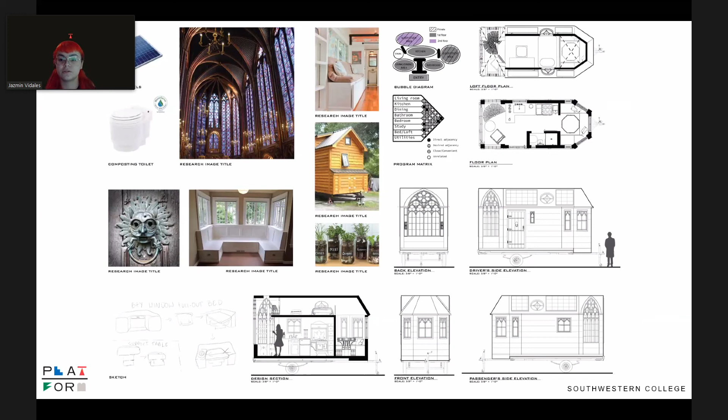Hello, my name is Daniela, and I'm a first-year architecture student. Pacific Everblue is a tiny house designed to accommodate 2 students. There are 2 separate sleeping lofts, a small kitchen, and a bathroom in the 8x16 space. The idea behind the teal exterior was to transmit the calming properties the shade evokes to the residents, a feeling elevated by the greenery in the plant boxes and the vertical garden.

The tiny house includes features meant to cut down the residents' carbon footprint, such as solar panels and a composting toilet. A kitchen composting pile was also included to help reduce landfill waste and lower the amount of methane gas that is being released into the atmosphere.

Hi, I'm Anayssa Vasquez. I designed the duo for college students, primarily focusing on students living on their own for the first time and having to live with a stranger. To promote a sense of privacy, I used a gooseneck trailer to establish elevation changes, making it feel like each occupant has a side of the home to themselves.

For construction, the walls are structurally insulated panels and the exterior pine wood siding is made of engineered wood. These two components help reduce the overall weight of the trailer. To promote green living, 4 solar panels are attached to the roof, feeding its collected energy to stackable saltwater batteries. A gray water system is installed to use the recycled sink water for gardening. Lastly, to help keep the home cool, double glazed thermally broken windows are installed.

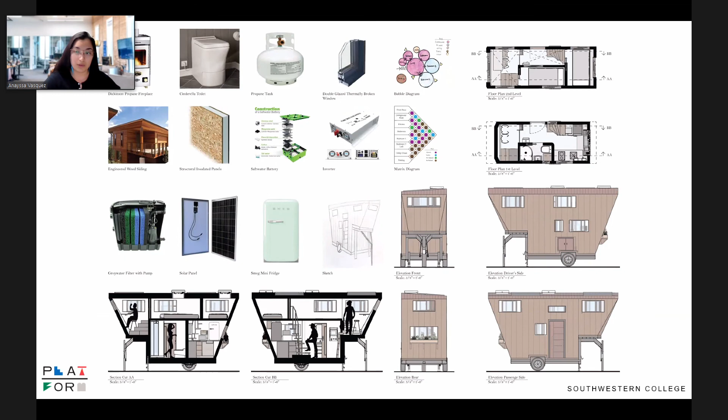Hello everyone, my name is Jose Carlos Vasquez and this is the student house. It is a tiny house mainly designed for college students, which features all the necessities that any student may require. It has a washer and dryer stack, a breakfast bar, and a kitchen.

On this slide, we can see the materials that were used for this project. We have a bubble diagram, programmatrix, the main and loft floor plan, which gives us a better view of how the distribution of the tiny house is from the interior, and the elevations.

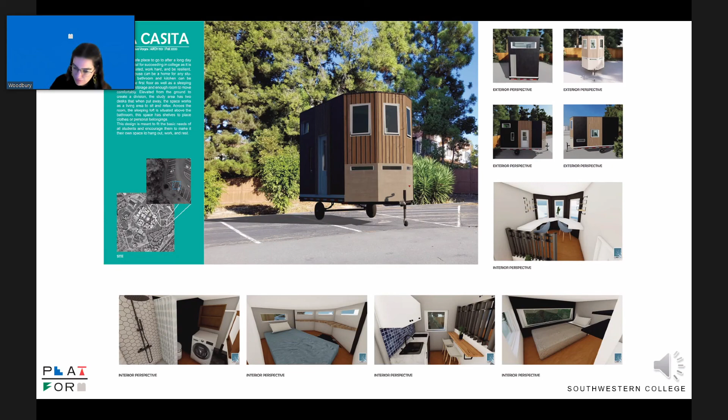Good afternoon, I am Sofia Bravo, and my design La Casita is meant to fit the basic needs of all students and encourage them to make it their own space to hang out, work, and rest. The bay style window is there to allow natural light into the space and create a visual focus point that also adds variety.

The distribution of this tiny house has the kitchen as the center, and everything flows from there, meaning it is connected to every area of the house with an access point to them. The appliances are meant to save space and use.

Furthermore, this is a clean and functional design with fast and flexible one-day assembly. Some additional aspects include being energy efficient, solar powered, made from natural, non-toxic materials, no foundation needed, and minimalistic design. Thank you.

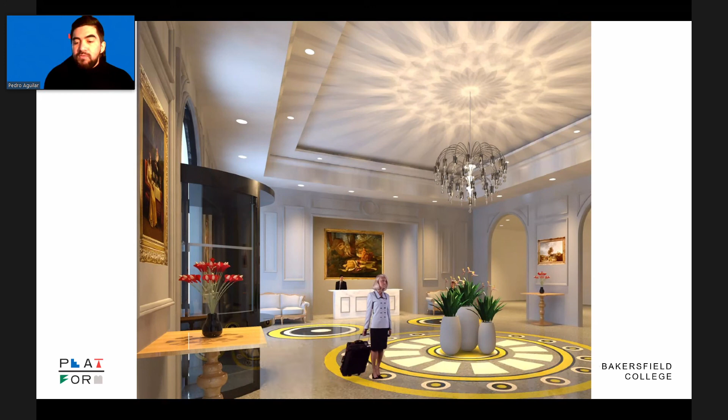Likewise, linear details are highlighted on the walls. We added some paintings. In this view, we can see how the two entrances are parallel in the same way that the center of the lobby is parallel to the reception.

We can see how the colors and shapes used in this design transmit peace and tranquility to those who are in this area. A totally peaceful atmosphere, which was the main idea of this project.

We can see how the... Are you there, Pedro? Hello? Can you hear me?

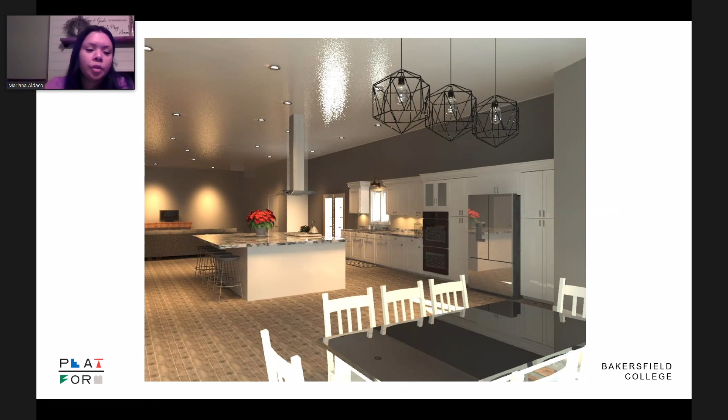Here I added a coffee bar with glass cabinet doors just to have that much more space to decorate and personalize your area. Right next to the coffee bar, I placed a wine fridge because, why not, right? And of course, I had to add a pantry for that extra storage we all need.

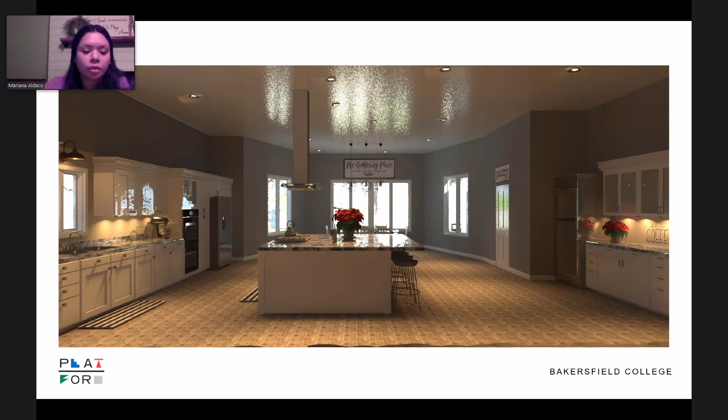In this rendering, you can see how open and inviting this kitchen really is. You can also see the size of this huge island I created with the wall tool. For the trim around the island, I used the sweep tool, which was also used for the kitchen cabinets, crown molding, and the wall base trim.

On this slide, we can see the countertops a little closer. They were created with a floor tool and brought up to the desired height.

By adding the half hexagon design in the dining area, it gives us that much more beautiful view of the mountains. And then I added the retaining wall to give us that privacy and security from the landslides, especially in the rainy season.